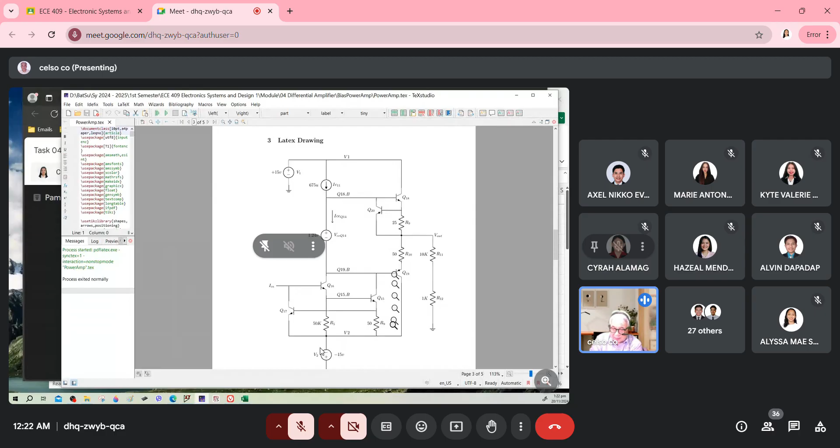Battery or voltage generator, because this is the one biasing the base and emitter, all right.

Okay, so I'll open the first semester. I'll close this one first. Power amp PWI, power amp algo. Okay. Power amp is just easy for you to do. Okay.

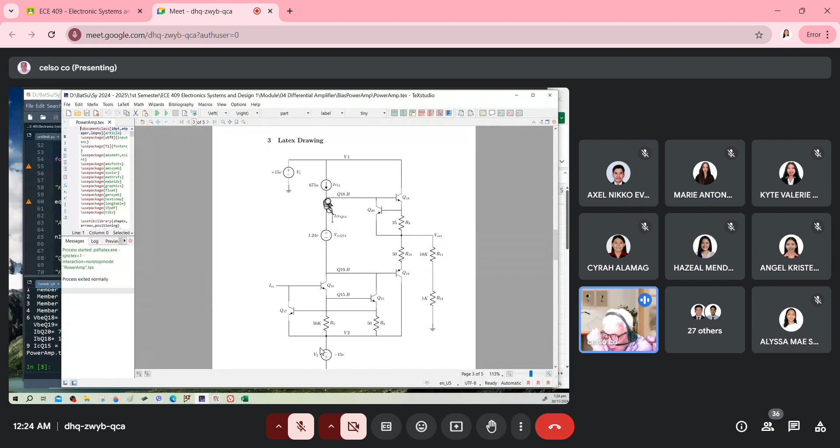So this is the Kirchhoff's voltage law. So once you establish your equation, then you can start computing for the voltages of each section of each component. Okay, so let's go to the algorithm. This is the Kirchhoff's voltage law, and this is the initial value. You assume that the VBEQ18 is VCEQ14 divided by 2. And then you compute the emitter current of Q18 by using the VBEQ18, you compute the IEQ18. Knowing the IEQ18, you compute for the VR9, and for the current across BR10, you assume that it is IEQ18. So that is the initial value for this Kirchhoff's voltage law.

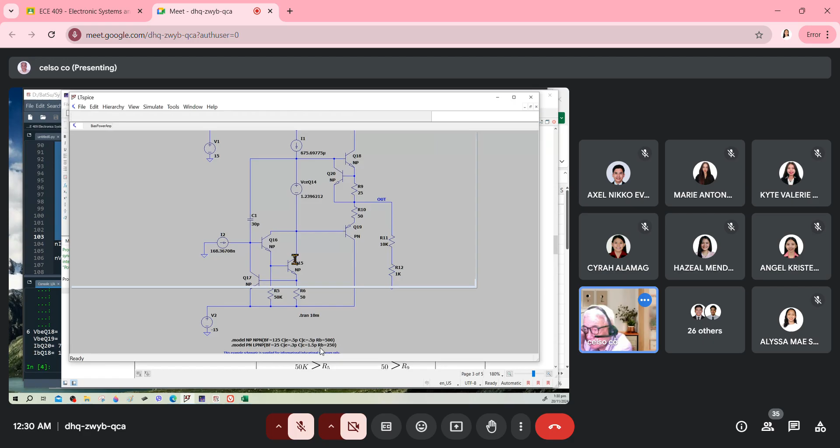Okay, let me open the original file. That is the portion from here going that way and going this way. By the way, I added R12, 1 kilo ohm here. It is not part of the LM741, but I added it just to balance it, because you have 10K and then 1K ground, and the other one is ground 1K and then 10K input. I will explain later why this is a differential amplifier.

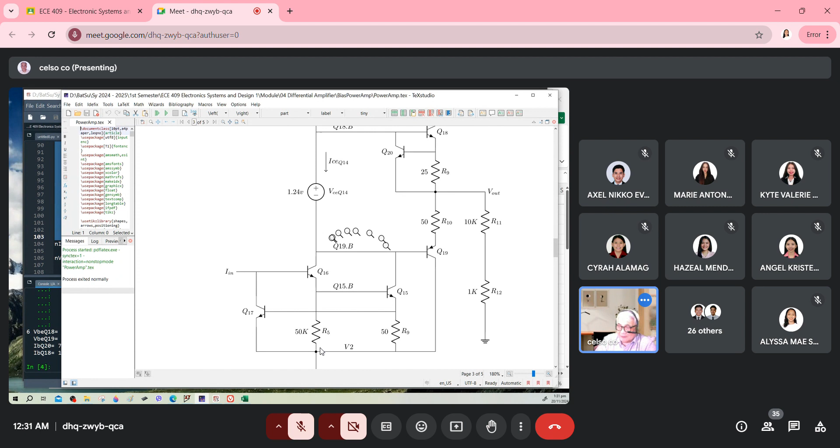All right, so we establish the value of this. What is important is you know the value of IQ19. The current flowing through the VCEQ14 is ICEQ14. Then we compute the Kirchhoff's current law at Q19.B. ICEQ14 plus IBQ19, which you know, and this one you know, but you do not know Q16 and Q15. That is what you need to find out.

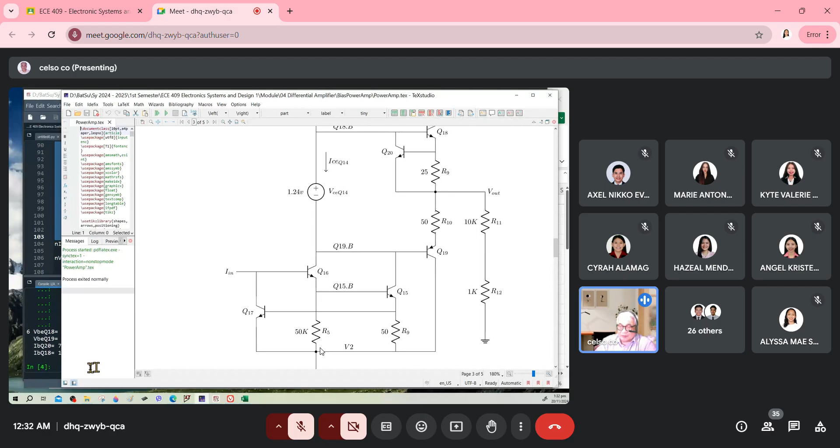So with that Kirchhoff's current law, you start with I16 equal to zero. That is the idea. Why choose I16 to be neglected? Because the greater part of the current is through IQ15. IQ16 supplies only Q15. Just a moment, okay?

Okay, sorry about that. Okay, now your Q19.b, this is the equation, all right? So this is familiar to you. You have IBQ19, ICEQ14, that is from the voltage generator, and then ICQ15 and ICQ16. Now, you have only one equation, but you have two unknowns.

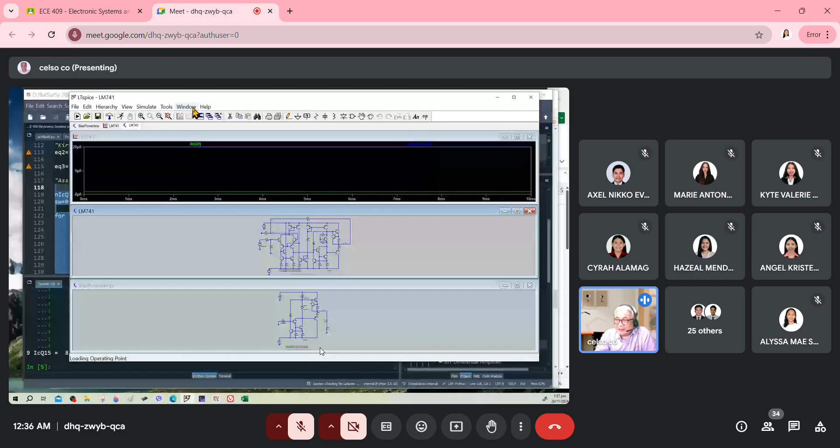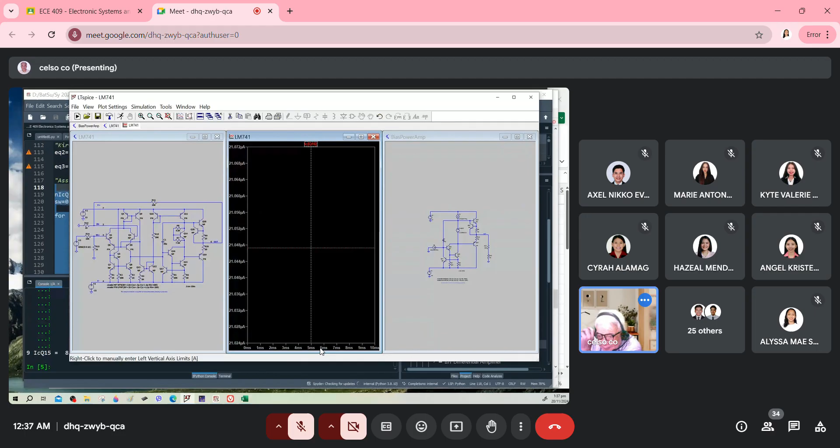Okay, tile vertically. All right. Then we can check the current at Q16, this one, you check the current here. This one, about 21. But the result of my simulation is 14. Is 14. Kulang. Pero medyo malapit-lapit na yan. 14 din yan.

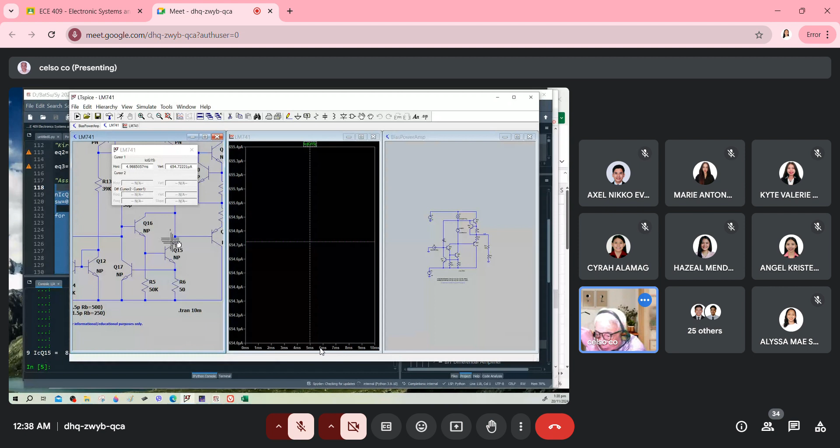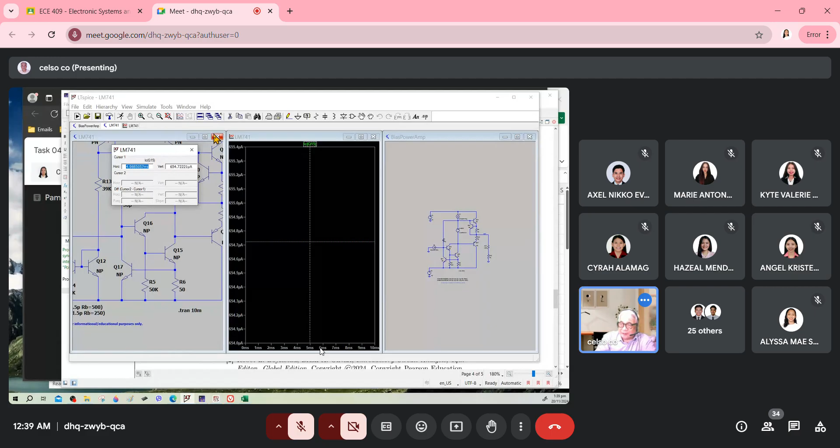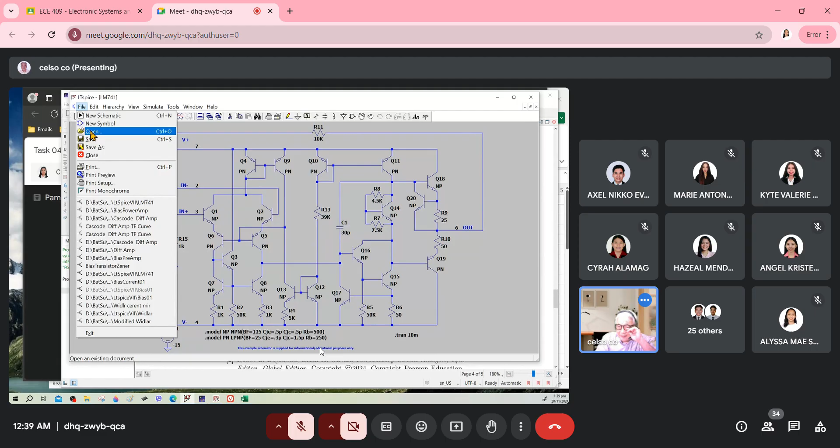Of course, it depends on how you made the algorithm. So this is just a simple way of finding the values when you do analysis of a circuit like this. Now we will go to another topic which must be interesting to you. This is the front end, let's open this again, this portion. Let me open what I call the bias preamp. Okay, so this is the bias preamp.

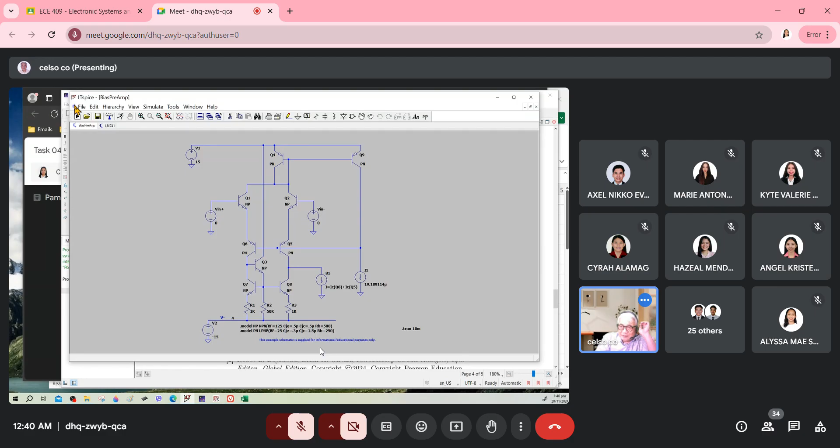I did not put the circuit design here. I just get the current generator, which is 19 something, and then I maintain this. Then I replace the other, and I just put a voltage generator at the input and the output. And this is it. There are other circuits on this, which I will show you. The other one is this cascode design. So this is the same design. Let me explain why I am presenting to you this portion.

When you design a circuit, you don't start with transistors. You can start with some transistor, but most of the time you start with generators, voltage generator, current generator. Now, in this case, we have what we call the cascode of Q1 and Q2, and the voltage here is the input, and the output is at the emitter. We call this one common collector because the collector is common to the ground. So that is common collector, or emitter follower.

Now, the common collector has high input impedance but low output impedance. Now, we need a high output impedance, because after that we will be using a current source to drive the power amp. So you connect the common base. This is a common base amplifier wherein the input is the emitter.

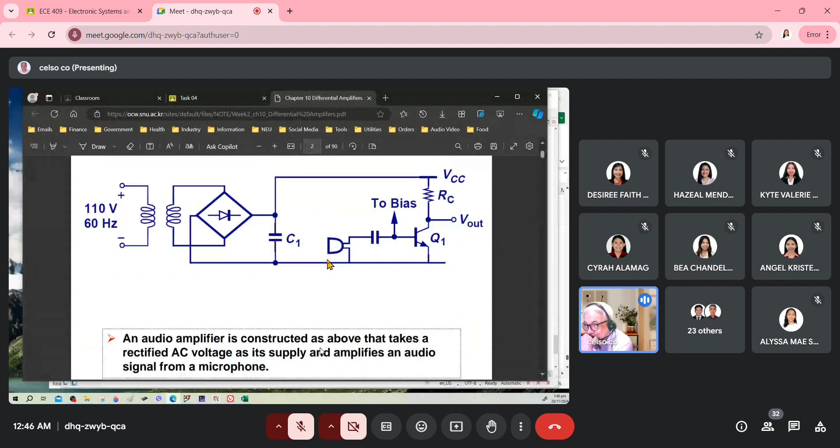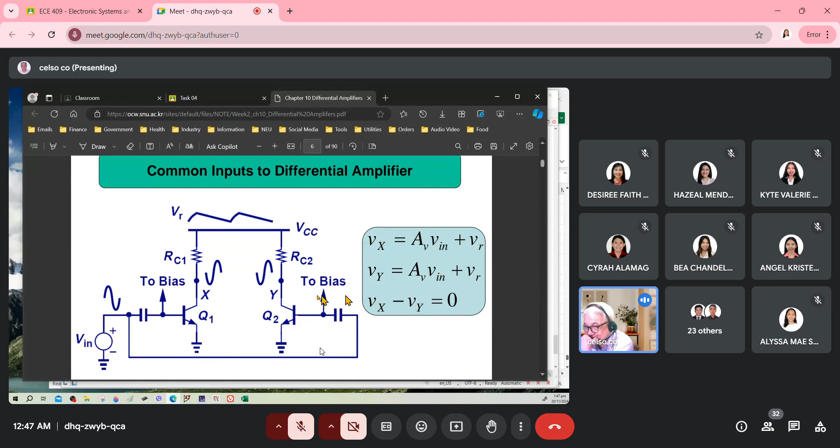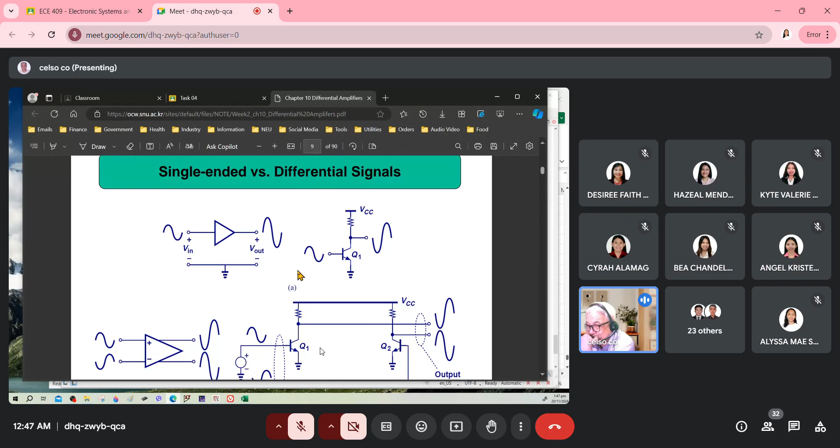So this gives you the basic description of the differential amplifier. So nandito lahat yon. Yan. Yung noise, how does the differential amplifier cancel the noise? So, yan nakalagay dyan, ano? Very simple. Okay? So, yan, di-discuss sa iyo. Ito, common emitter yan. Yan. Ngayon, the thing that I took from this, so basahin lang niya yan at review lang niya yan sa board exam. Ito, tsaka ito, comparison yan.

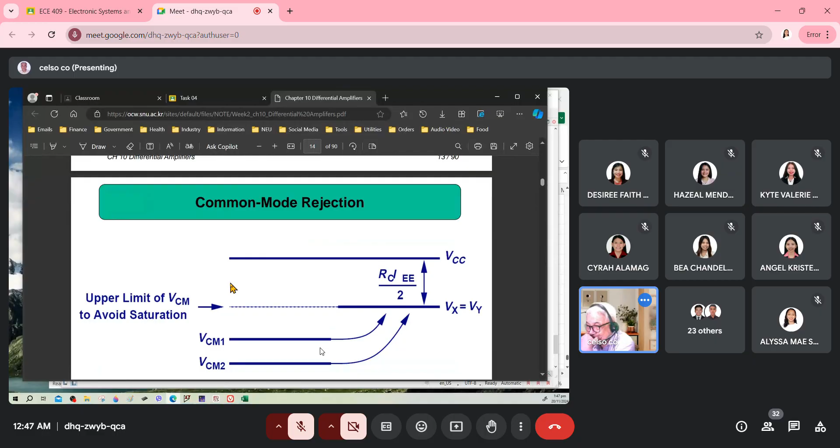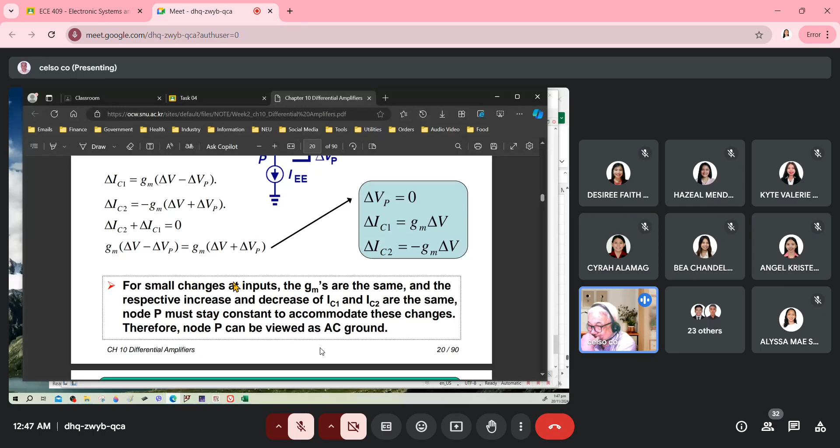This is the particular one that caught my attention. Okay? Mga sample design yan, but merong isa dito na talagang, this one, large signal analysis. Ito, differential voltage wherein the currents are in exponential form. Okay? So, the difference between the two currents will give you the output, but this is all in exponential. And I developed further this concept. Actually, if you plot it, it will be a hyperbolic plot. Okay, input output characteristic. So this is the thing.

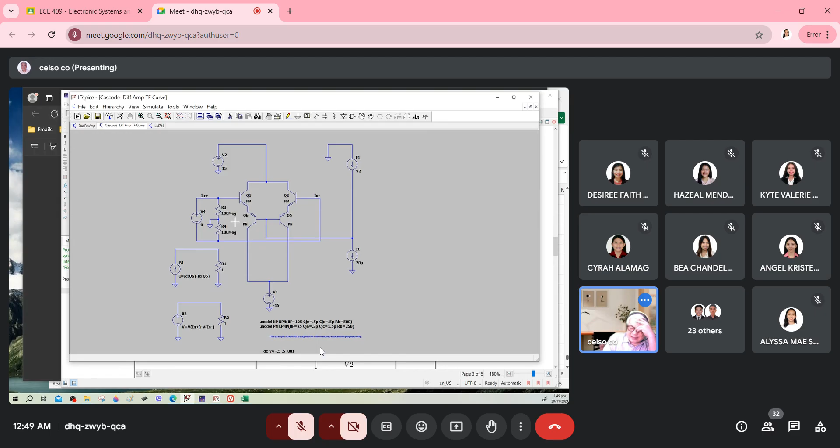If you take my notes, this will be, wait. This one, this will be my discussion point. All right. So, you will be familiar with this circuit. Now, notice that in LTspice, I like to put voltage difference between the two. So this is the voltage. So I put here R3 and R4 with 100 meg just to create a ground at the middle of V4. So I just created the ground at the middle because it will take very, very long time to simulate if there is no ground at the middle here.

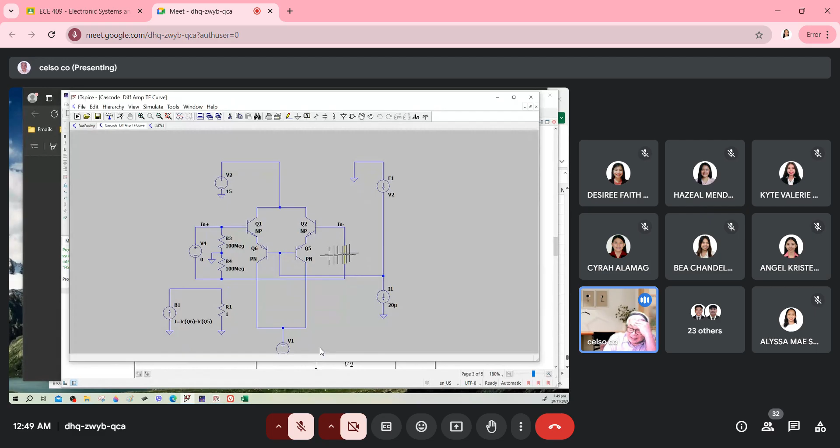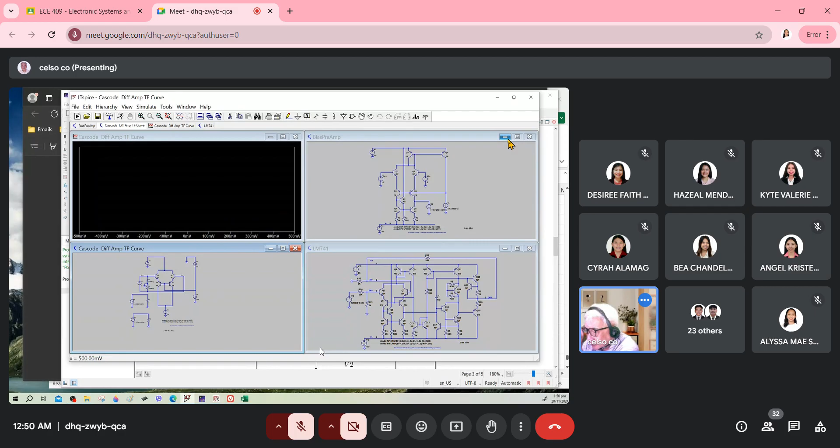All right. So what happened is we will do a DC analysis of this circuit. All right. So this is now the DC analysis of this circuit, like this. Okay. So we run this one. All right. And this is the output. All right. So I will minimize this one and I'll do the vertical. All right. So this is the, see. Now the input voltage V4 is varied from negative 500 millivolt to positive 500 millivolt.

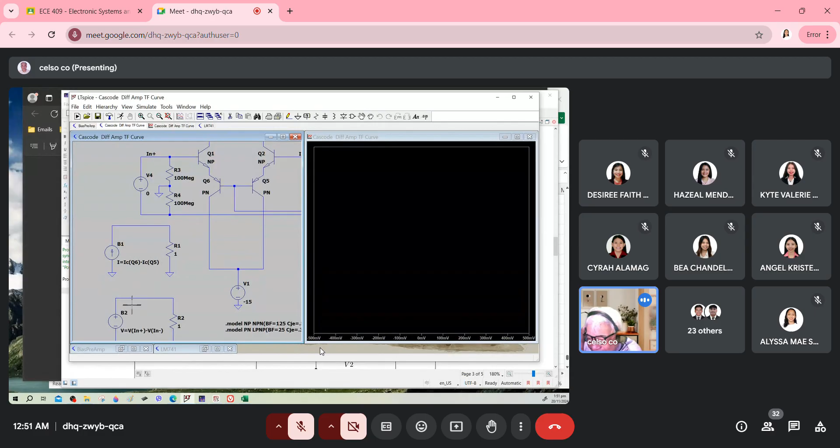Now, what is the output? The output is the difference between the output current of Q6 and output of Q5. To get the difference of the two, you have this special function B1, which is what we call arbitrary function. So I use this function to do circuit analysis like this. This is not part of the circuit diagram. So this one provides a current output, the difference between the two. So I can put it short circuit to the ground, but I put 1 ohm just to get the equivalent voltage drop here.

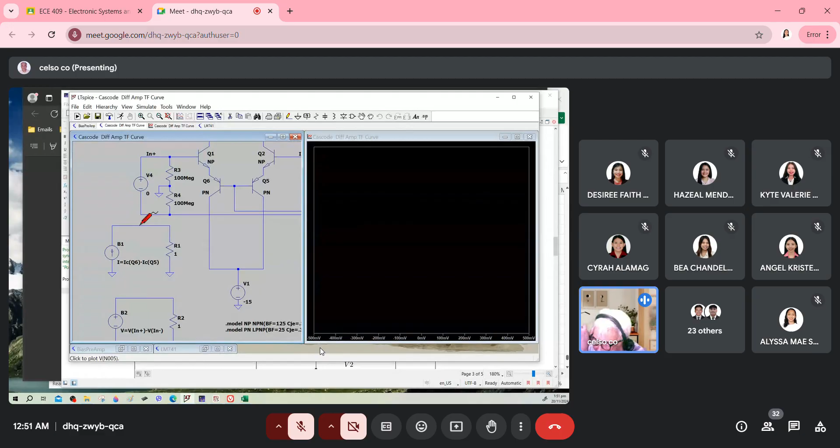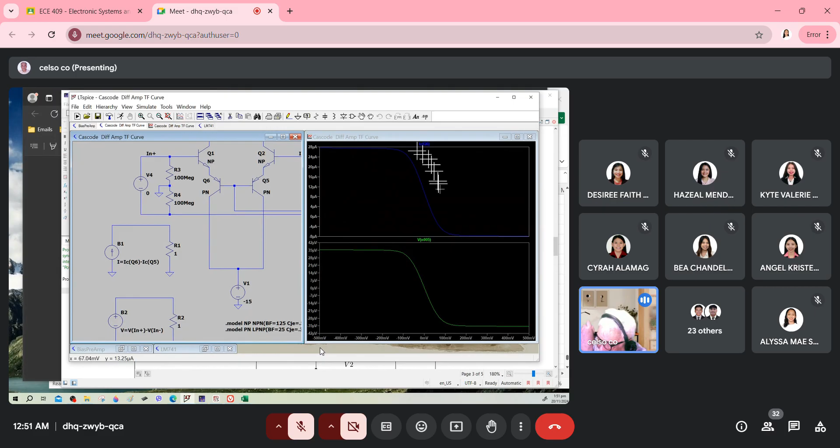Now, when I plot the difference, this is what appears. This is the hyperbolic plot like this. All right. Now let's see. Suppose we plot the individual. This one, so that is the one. Another one is, we plot the other one.

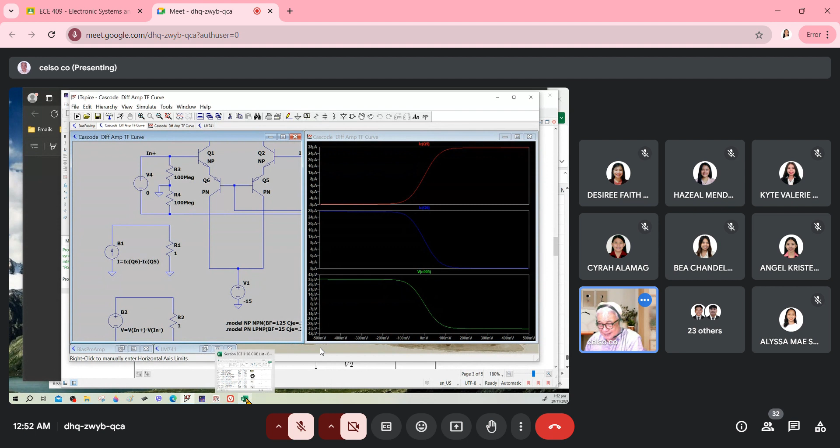the idea. All right, do you follow, Desiree? Do you get it?

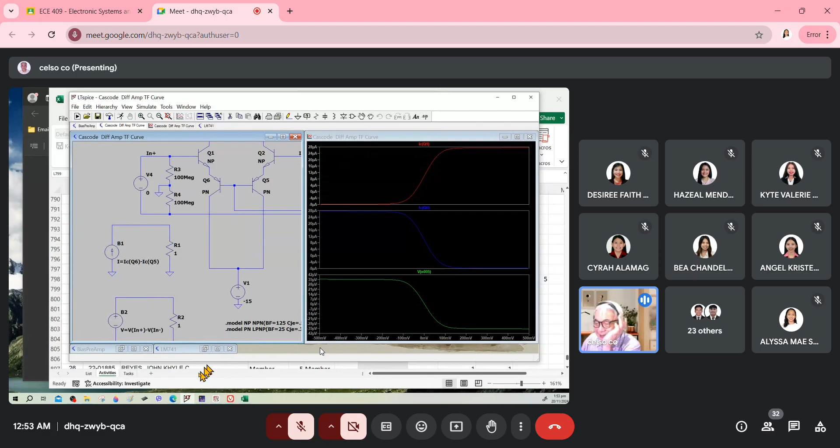Okay, maybe not so clear again, then I will try another approach, but this time I will use the differential amplifier bias preamp. Then I will get this, wait, not the data. I'll get the preamp and the preamp algo. Now I'll go first to the preamp algo. Alright, but I will open first this one.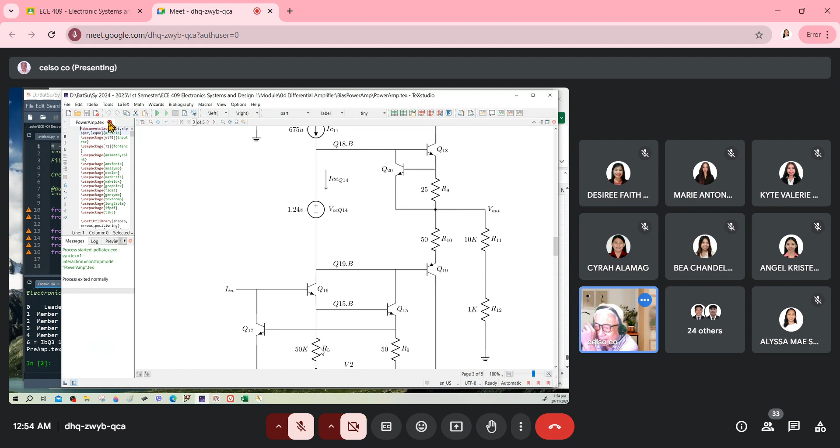Okay, I think I need to restart the kernel. And then run it. Okay, and then I will display the front. This is the back end. The front end, let's open it. Differential amplifier. Oh, preamp. Okay, the input of LM741. Okay.

By the way, just a minute. Maybe I should. Meron bang dumating? Wala pa, no? So I'll just take a snapshot muna. Snip. Mag-snip lang ako. Kunin ko lang yung... Okay. Okay. Save as. Today is 20, 2 0. All right. Save. All right.

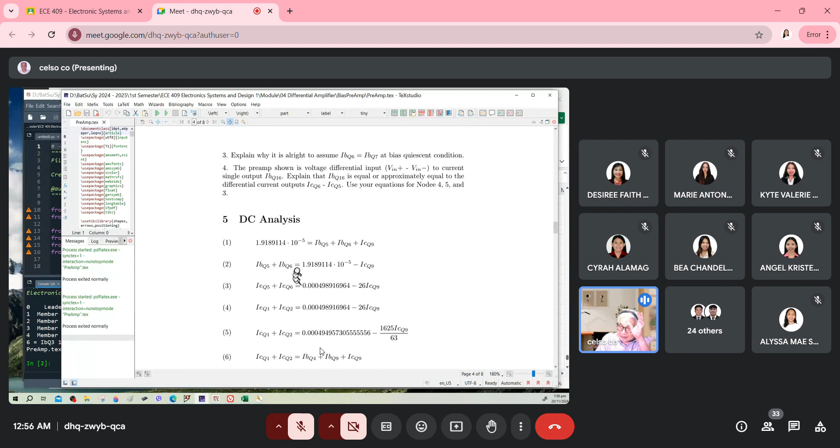This is now the preamp bias. So this is the circuit. This is the schematic that I drew using LT Spice, and I have input voltage Vin plus and the input voltage negative. And of course, I changed some circuit here. Okay. We will discuss this DC analysis, but in the meantime, I'd like to show you this. Okay, so we will discuss this diode. This is quite a tricky one.

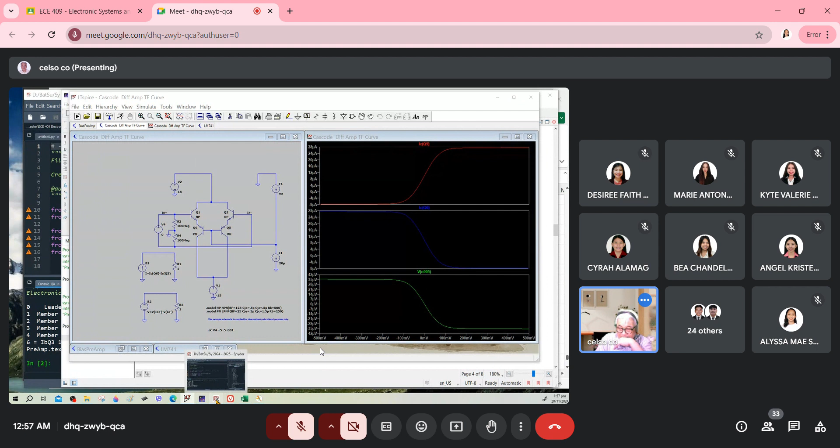Okay. So let me go first with this, a preamp bias. Okay, so I have here the DC analysis, and I have only one equation for DC analysis. So if you take a look here, no, I have several equations because this is a loop. So the DC analysis is you compute for IBQ, IB, and so on, the current for each component.

All right. So the first thing here is this node 1. This node 1 has ICQ13, and then the sum of ICQ13 and ICQ9, and then IBQ6 and IBQ5. This is node 1. Now, this node 1, this is the first equation, and then you combine the base current and you make it the collector current of Q13 minus collector current of Q9. So this is for node 1.

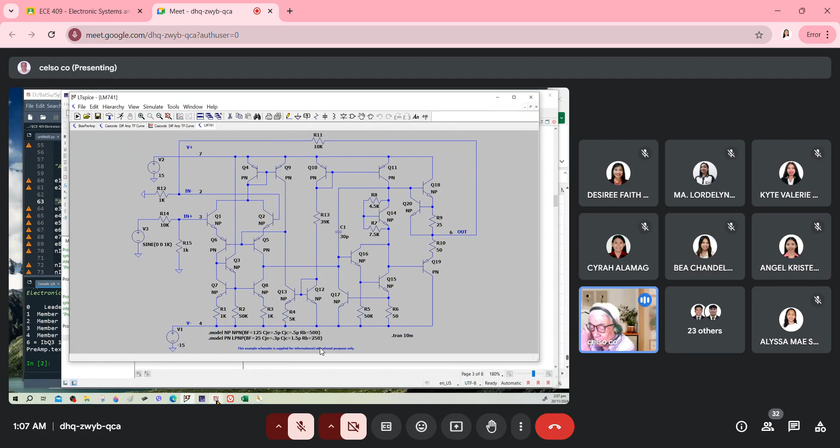Okay, let me tell you about this. Okay, this current mirror is exactly detecting the current of Q2. So that is the purpose of this current mirror. So it detects the current and then it supplies here. All right. So I represent this with the current generator. All right. So that is the whole idea.

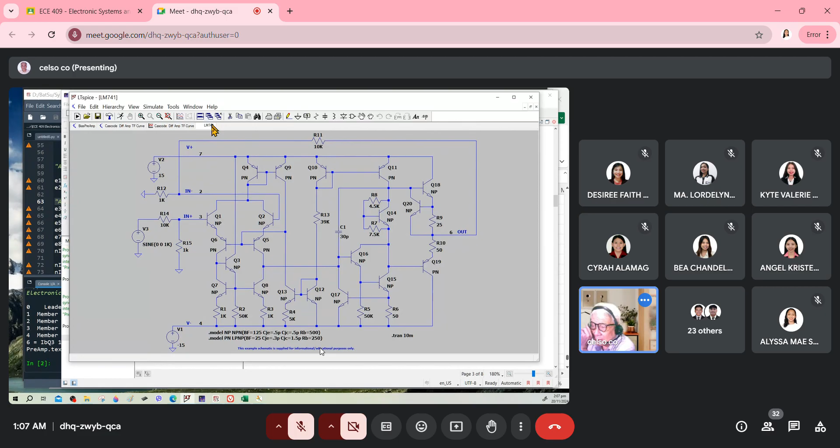Okay. So where is my... okay? So we will minimize this one. Okay. Window tile vertical. Okay. Let's minimize this one. So we will be concentrating here. Now allow me to do some demonstration. Okay.

This node 1, what happened is the base current of Q6 and Q5 is equal to the collector current of Q13 minus the collector current of Q9. So that is the one. If you make it emitter current, then you have to multiply by 1 plus hFE PNP because these two are PNP. Okay, so now you equate it with IQ1 and IQ2 because they are connected in series, so the current must be the same. So we have this.

And then we get the collector current of Q1 and Q2. So what happened is you multiply by hFE NPN divided by 1 plus hFE NPN. So a little bit less than 1. All right. So you got the output collector current for Q1 and collector current for Q2. All right. Now, the ICQ1 and ICQ2 is equal to ICQ9 plus 2 hFE PNP. Why 2? This is the Widlar current conversion.

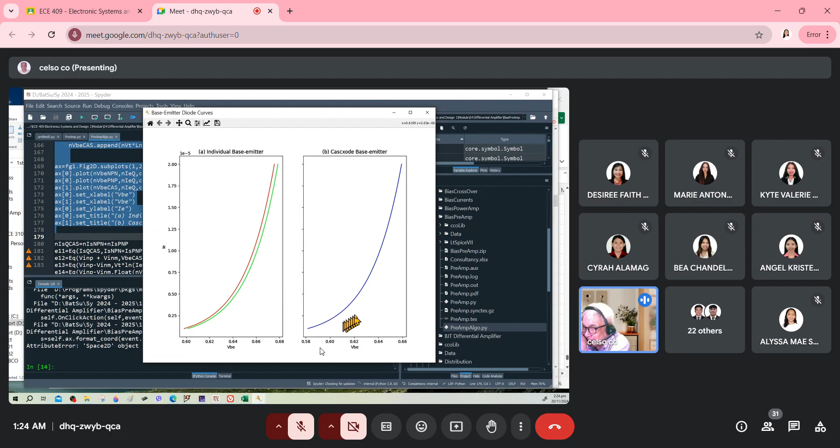So, let me check on that. Sandali, parang may error ako dito. Okay? NPN, PNP, VBE, and VBE cascode. Okay?

So, the idea is I have the current and then I add the two saturation currents, so that it can plot the current. So it will make the voltage smaller if there is a difference. Okay, so whatever the current in one diode is the same current in the other diode, and they may have only different ISP and ISN, and then for the voltage drop between the two, you just add the two voltage drops.

Okay, so what will happen is you have the same current but almost double the voltage drop. So what is the effect of cascode, the real effect of this? I better ask.

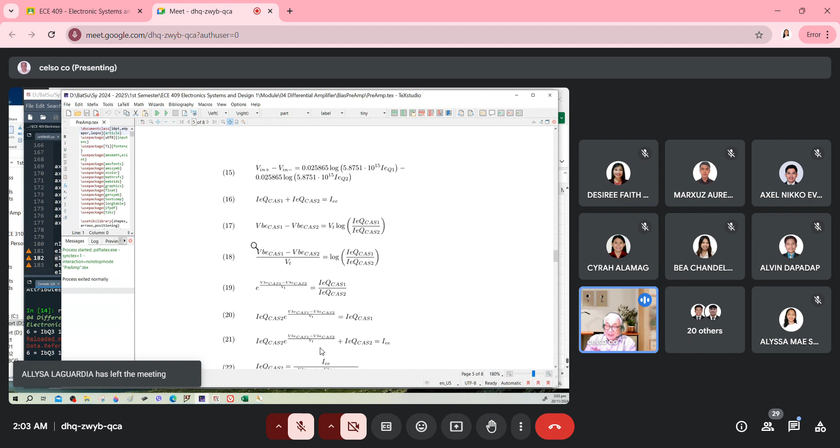So, yun ang lalabas dito sa ating... This is what we call differential tan hyperbolic transfer curve. Yan ang transfer curve. Ano yung transfer curve? Itong ilalim, ito yung variation ng input. Itong dito, variation ng output. Alright? Ngayon, itong curve ito is called the tan hyperbolic.